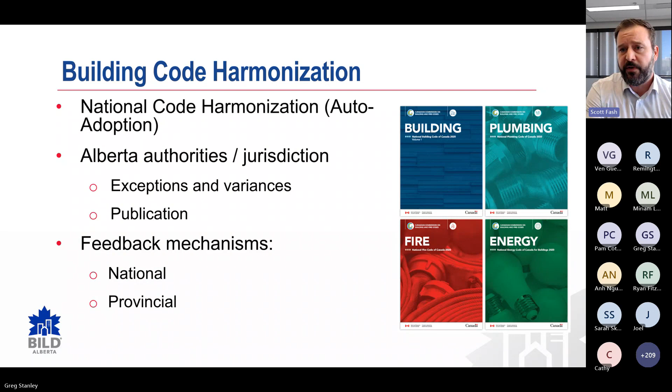Then provincially, as I mentioned through this auto-adoption piece, there are abilities for us to make modifications to that code before we adopt it. That's typically done through engagement with ourselves and Municipal Affairs within the government of Alberta. We also work and have representatives on the Safety Codes Council, which is another one of those bodies that provides input to the federal government. I'll go to the next slide, Greg.

So with all of this being said, where we are at right now is adoption of the 2023 Alberta edition of the National Building Code, with a May 1st implementation date. The key thing I want folks to be aware of is if you get an application or permit submitted prior to May 1st, you can still abide by the old code. So if you're worried about whether you'll be compliant with the new code or not, get your application in prior to May 1st and you can still abide by that old code. But after May 1st, the intent is that the new code will be in force.

The big item that's been brought in as part of this code cycle is what's called tiered energy codes, and I'm going to spend a bit more time at the tail end of this presentation going over that. But there's also a variety of other technical changes that are going to impact design and construction, and that's why I want to have Greg go over that in a little more detail - they are rather technical. So it is a short implementation and education timeframe.

This webinar is one source - we've got a ton of resources available on our website that we've been publishing on a regular basis. We do recommend members go explore that website. We'll have that up on the screen towards the tail end of this presentation as well.

Next slide, Greg. So we're going to go over 10 of the key changes right now. Before I hand it off to Greg, just as an overview - these were reviewed by our Provincial Residential Technical Committee, or PRTC. They went through that code line by line to understand the core changes that we think will impact members. We rated them based on impact, cost, and frequency, just to give a sense of what we really thought members needed to be aware of.

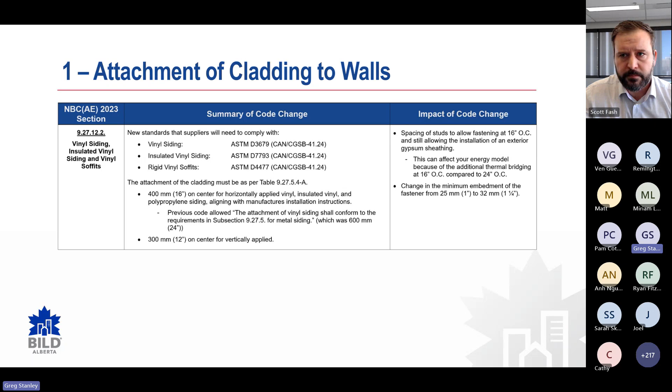First up, we have attachment of cladding to walls. Previous versions of the building code did not address specifics for fastening vinyl claddings, and referenced using the same fastening as you would for metal claddings. This code change has aligned the building code to manufacturer installation specifications based on requirements set out by the Vinyl Institute.

Important to note, as of May 1, horizontal vinyl applications will require a maximum fastener spacing of 400 millimeters on center, so that's 16 inches. It must be fastened to framing members, furring members, or blocking between framing members - fastening to sheathing alone is not compliant. This impacts traditional construction, where normally you'd use 24-inch on center spacing; with horizontal vinyl, that will need to change down to 16 on center.

Then we get into vertical vinyl applications. That will require a maximum fastener spacing of 300 millimeters, 12 inches on center. Your vertical application is also required to be fastened to the same members noted for the horizontal application.

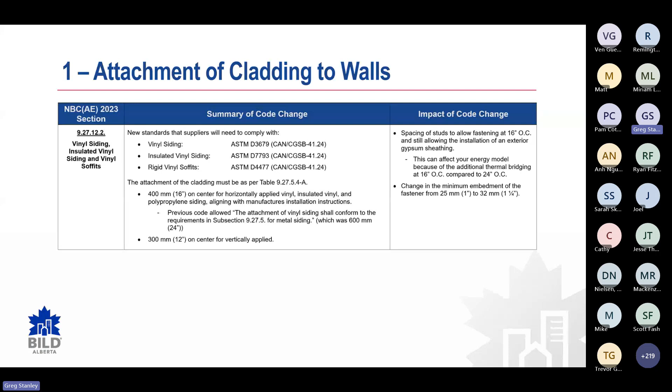Since this change has come out, it's prompted a little more review, and we've had some member organizations reach out to the Vinyl Institute - they have been testing other fastener spacings, so there's going to be more to come on this. We'll keep all members informed as we find further information on different spacing, if we can go back to 24. But as of May 1, we will need to adjust to make sure we're compliant with the attachment of vinyl claddings.

Next, we're going to get into penetrations in a rated assembly. There are some new requirements for penetrations within rated assemblies. Pay attention to updated requirements for continuous barriers in section 9.10.9.2, and section 9.10.9.8, which references outlet boxes in concealed spaces. This will require more attention, as there are updated requirements for maximum sizes and required separations.

Non-combustible boxes are going to be allowed with a maximum individual area of 24 square inches and an aggregate area of 100 square inches within any 100 square foot of surface area. Combustible boxes are allowed and must be separated by an enclosure no larger than 465 square inches, approximately 20 inches by 20 inches. It must be made of a fire block material, or located in a space with rock or slag insulation where the sides and back of the outlet are encapsulated by this insulation.

These boxes will also have a maximum individual area of 24 square inches. Important to note here is your maximum individual area of 24 square inches - your typical outlet box is only 8 square inches, so you'll have to pay attention to any gang switches or outlets. You can generally have a maximum of 3 gang together before you exceed that 24 square inches, so you might have to have multiple gangs that are separated from each other.

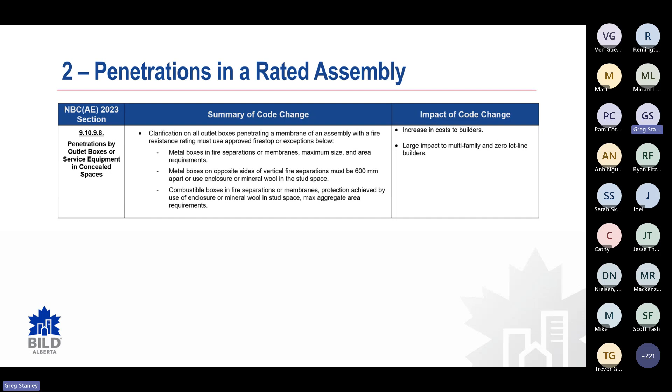Next is outdoor intake and exhaust openings. This change was brought about to align the building code with current requirements of the gas code for intakes and exhausts. You're going to require a separation from air intakes for mechanical ventilation from exhaust outlets that may contain contaminants, such as gas vents, with a separation of 1800 millimeters. That's 5'11". These air intakes are for fixtures such as your HRVs, fresh air intakes, makeup air intakes, things like that. And then also exhaust outlets that can discharge air that contains moisture.

These exhaust outlets are for your dryer vent or bath fans, pieces like that. That one will have to be 1800 millimeters away from the air intakes and any vented soffits. And if any of these same exhausts are in a sidewall and within 1800 millimeters of a soffit, there's a portion of soffit that is going to be required to be unvented or blocked.

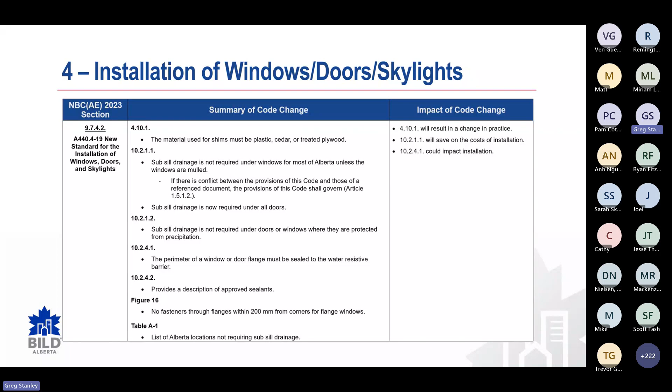So again, shim materials may result in a change of practice for builders in the province. And there may be some cost savings if you're in a location that will not require sub sill drainage, but we also recommend working with your window suppliers to determine your best installation details for your home that are going to comply with these standards.

Next up is required guards. We have had some changes for when a guard is required to be installed. Previously, code required that the guard would be installed where your landing surface was greater than 600 millimeters from the adjacent grade, or if the adjacent grade within 1.2 meters of that surface had a slope of more than 1 in 2, you would require that guard as well.

Now the code is going to require the guard where the surface is more than 600 millimeters between your adjacent walking surface and that landing area, but this is going to be within 1.2 meters. So they took away the slope portion out of the article. So if your grade 4 feet away from your surface is going to be more than 600 millimeters from your landing, you will require to install that guard.

So code will now require the guards to be installed for that surface as well. So even when you get into the portions where you might not require a guard because you have, say, less than 3 risers, if that grade at the 4 feet is more than 600, you will still require that guard. The building code does have some further information and diagrams within the notes to Part 9.

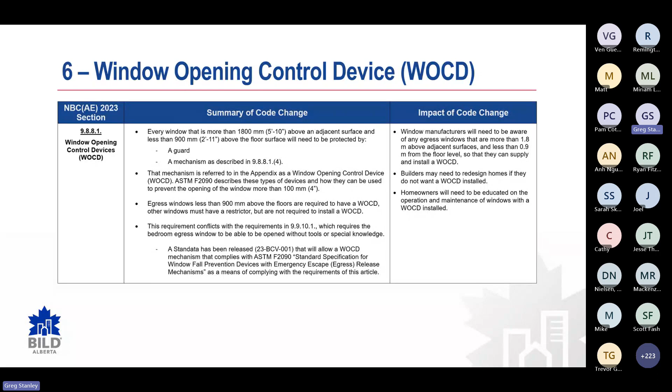However, the variance or the standata will not be permitted for use in any adaptable or barrier-free dwelling units. So if you are building any of those types, just be mindful of the new changes to windows here. All building standata can be found through the government website. It's also going to be a good topic to review with your window suppliers to make sure your homes will meet all required compliance for windows.

Next is fire resistance and fire protection ratings. Tables 9.10.3.1A and B have been updated in the building code along with the notes to these tables. As you use these assemblies in your projects, it's going to be good to review and make sure you're still meeting all of the required ratings as they've changed, and that you're meeting all of the notes within these tables as well.

Some of the notes may require you to change some of your construction practices. One of the major additions to table A is note 16, which now requires attachment of gypsum board on the interior side of an exterior wall assembly with fasteners spaced no more than 8 inches on center, and it will require all of the joints of the gypsum to be backed with blocking as well for attachment. So again, if you're working with any of the listed assemblies within the fire and sound resistance tables, have a look through, make sure your practices are going to meet the requirements of these new changes.

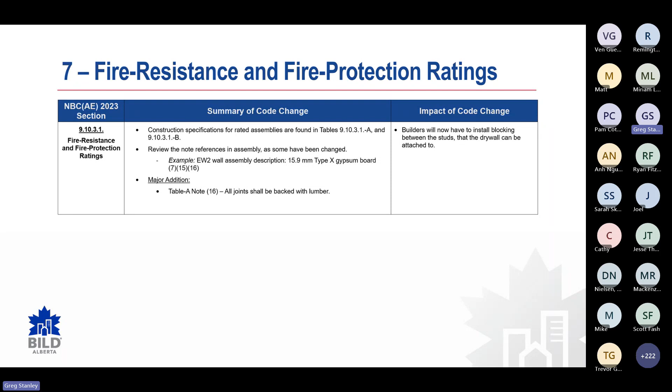8th on the list was equipment efficiency. There have been many changes for equipment efficiencies in 9.36. Highlighting some of these, minimum equipment efficiency has increased for warm air furnaces from 92% AFUE to 95% AFUE. This change now aligns with NRCan's minimum requirements for changes that were effective December 12th, 2019, and would apply to new construction.

All gas and electric forced air systems must now use ECM high efficiency motors. Service water heating equipment has changed from a measurement of EF to UEF as well. There's quite a few adjustments within the equipment. One specifically to note is that the gas instant systems may have slightly increased minimum performance requirements, especially when you get into the larger systems.

So what this means is, typically any builders using the performance compliance path for energy efficiency are going to see the most impact, as your reference house baseline will improve because of using that 95% efficient furnace versus the 92%. It's going to make it a little more challenging to meet or exceed energy targets of the reference house. So pay attention to those as you're working through your details and determining your wall assemblies and efficiencies of your homes.

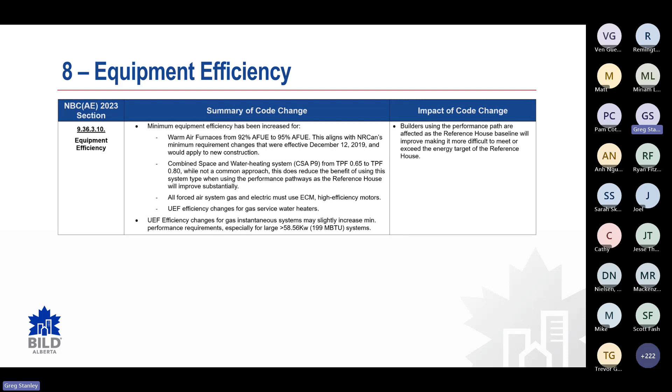9th on the list is air tightness. There have been improvements made to this portion of the code. While the previous code penalized builders when air barrier details were used from 925.3 and testing was not conducted, the new edition no longer has this penalty, and it neutralizes the energy loss calculated due to air leakage between the proposed and the reference house.

936.6 is a new section that has been added that gives some substantial clarity around the use and targets for air tightness in all of the compliance paths. This also provides clarity on the use of CGSB 149 for the determination of air tightness of building envelopes by the fan depressurization method. So this is your blower door testing.

And both guarded and unguarded testing is now allowed. Modeling of the proposed home will have a maximum of 2.5 ACH for all home types and will no longer allow the use of 3.2 ACH or 925 air barrier details. Modeling of attached homes can now use 3 ACH, which was previously 2.5 in the reference home model, which is going to allow for some increased air leakage at the party wall when you're using unguarded methods of testing.

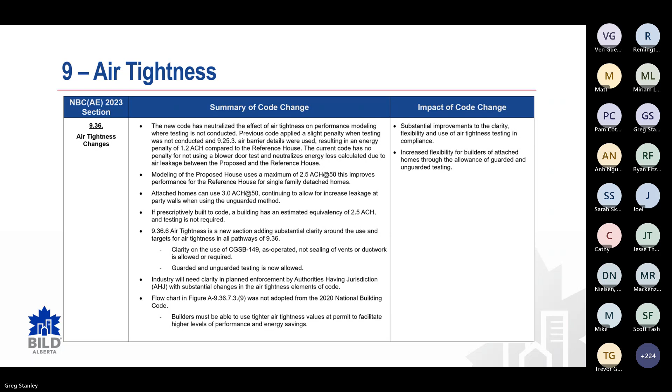And last on the list was energy efficiency. There have been various adjustments to 936 in this edition of the code. The biggest change is the addition of tiered energy performance. Scott's going to go into that in a little more depth after this.

What's important for us today is that the province has decided to start with Tier 1, and that means all municipalities must adhere to this. They do not get to choose a different tier. We are all going to play on the same level within Alberta.

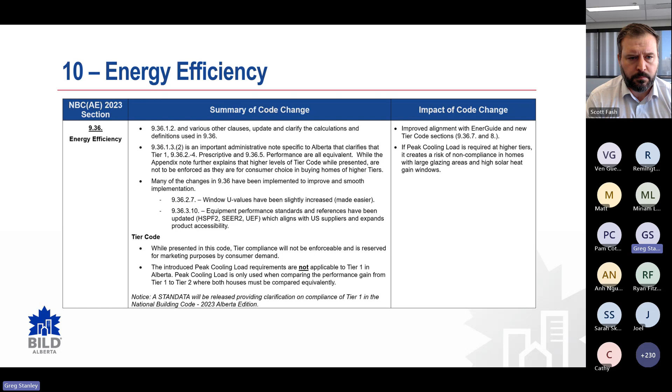So under the compliance clause, 9.36.1.3.(2) is unique to Alberta, and it deems that compliance with the subsections 936.7 or 936.8—that's the prescriptive and performance paths of the tiered energy performance compliance—under this section, all the tiered stuff, as long as you're Tier 1, meets all of the requirements of how we are currently working with performance and prescriptive compliance today.

So there's going to be very little change to your current construction practices to meet the energy targets. However, if you do choose to go to a higher tier, there are going to be additional requirements in those tiers.

So many of the other changes to 936 are going to make things a bit smoother for you as well. As an example, window U values have slightly increased. Just picking out zone 7A now will require a value of 1.61 versus the previous 1.6. It doesn't sound like much, but everything always helps a bit.

It shouldn't really change your products, but it'll slightly help the energy modeling if you are using the performance compliance paths. You will see some equipment performance standards and references have been updated to use different metrics such as HSPF2, SEER2, and UEF. What this does is align with US suppliers, and it can help expand product accessibility for us in Canada.

And last in this section, the continuity of installation has been improved to provide further clarification regarding what is required when you're installing plumbing or electrical conduits in the exterior wall. So have a look at that. It's going to give you some clarity on what you need to do when insulating around any kind of conduits or plumbing that may be located in these assemblies.

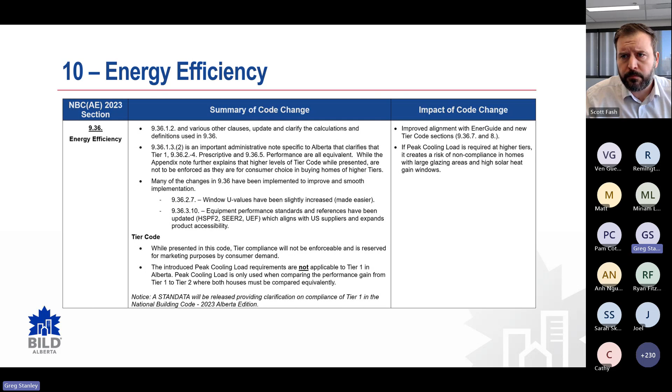So with that, I'm going to turn it back over to Scott to talk about the tiered energy codes.

Awesome. Thanks, Greg. Great job breaking down that stuff. And I see there have been some questions in the Q&A. For folks, again, please, if you do have questions, don't hesitate to throw them in there. I see Keith is diligently trying to respond to the ones that he can, but we will hopefully have Greg go through those after we get done with the crux of the presentation here.

Just to again give a bit of an overview of what the tiered energy codes are, where we are at, and where we're potentially going.

For those not familiar, this is intended by the federal government as a pathway to effectively mandating net zero construction for new homes. It's designed with tiers 1 through 5. Tier 1 would be kind of current code, what we do right now. Tier 5 would be what they'd consider effectively a net zero home. From Tier 1 up to Tier 5, we see progressive increases to air tightness, increases in terms of requirements for insulation, windows, and the efficiency of mechanical systems.

We looked through this in quite a bit of detail back in 2021 and 2022, and we developed what we called our tiered energy code roadmap, all available on our website. As part of that process, it was pretty apparent that tiers 1 and 2 should be manageable for the majority of membership. We didn't flag anything that seemed really difficult or overly complex for people to adapt to over time.

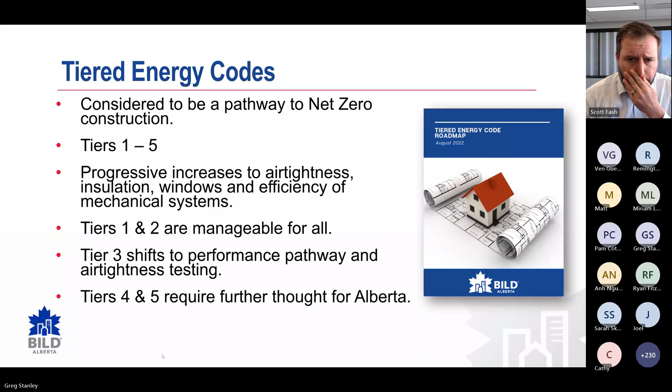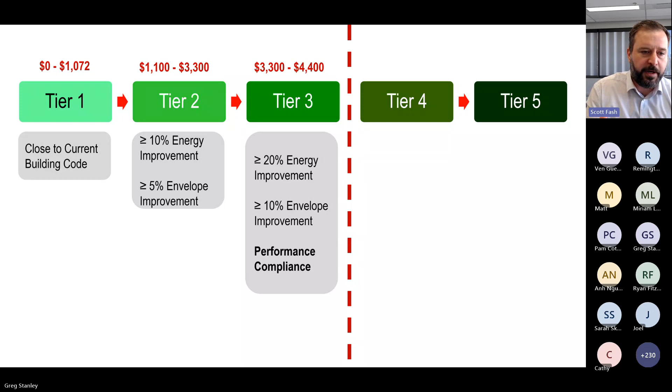Just to give you a sense of what tiers 1 through 3 are: Tier 1 is very close to current building code. For tier 2, you're looking at a slight increase in the energy improvement and the envelope improvement. Tier 3, a further increase in the energy and envelope improvement, but the big shift at tier 3 right now is a shift to performance compliance. Cost impact wise, tiers 1 and 2 are very minimal by and large. Tier 3, we see about a 3,300 to 4,400 cost impact.

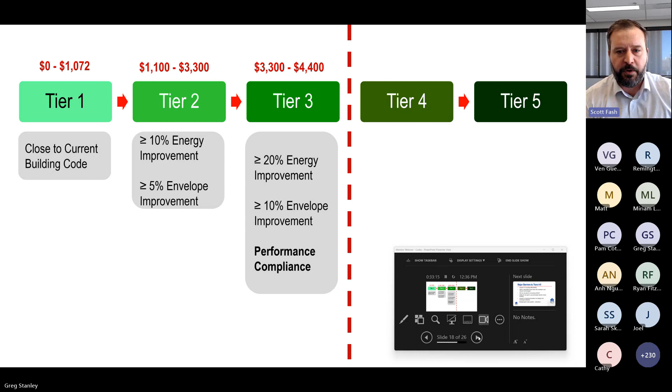But we'll skip now and I'll give a bit of an overview of what tiers 4 and 5 look like. If you go to the next slide, Greg. So, Greg, I think you've got your—

There you go, perfect. So the major barriers we're seeing to tiers 4 and 5: significant cost impacts on housing construction, I'll go over that in a second. But even beyond the cost piece, there's some technological challenges we're going to have to figure out provincially here in Alberta. One is it requires a shift to electrified home heat. For those not following this closely, that effectively requires us using a lot more heat pumps to heat our homes, and those have not been proven to work all that reliably in really frigid temperatures—minus 23 or 24 and cooler, there's some issues with reliability.

There's also a discussion that needs to be had on whether we'll actually be increasing our greenhouse gas emissions. If we move to electric home heat with a whole bunch of heat pumps tied into our grid, we still actually burn a lot of fossil fuels to generate our electricity. So you will likely be generating more greenhouse gas emissions than you would using a high efficiency natural gas furnace, which doesn't make a ton of sense.

Then there's the question of whether we have the capacity or ability for our grid to accommodate a more broad shift to electrified home heating, even in the new construction market. I don't think we've been given an answer to whether that's possible or not. I'm not an expert in this by any stretch, but that's one we pose to government and the proponents in favor of this—we need to first understand whether our grid can actually handle this.

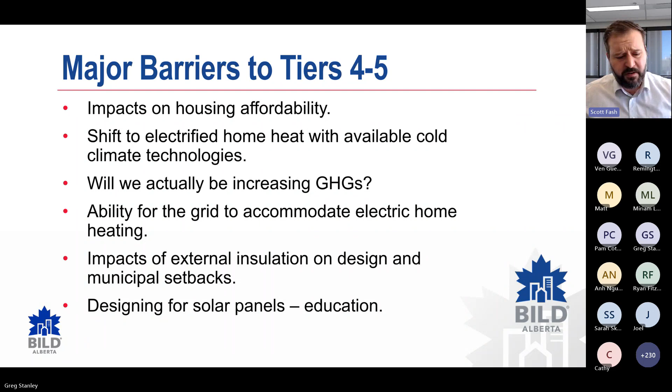So for tiers 4 and 5, the cost estimates we did go back to 2022, so I'd argue they're probably out of date. These costs likely would be higher at this stage.

Tier 4 would kind of be what would be considered a net zero ready home, although I've also heard you can potentially meet a net zero home at tier 4. It's confusing, there's no real defined lines on what's net zero or net zero ready, but in theory tier 4 is intended to be that net zero ready stage. You're looking at a significant energy improvement of greater than 40%, a significant envelope improvement, and then that big shift to electrified home heating.

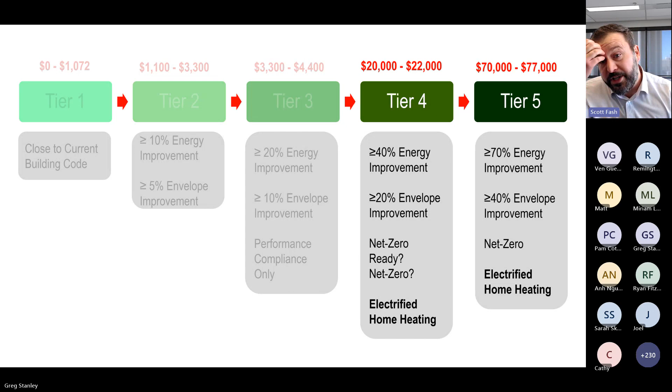The major difference between tier 4 and tier 5, beyond the insulation and efficiency of your mechanical systems, is that's where you're looking at adding PV cells or some other form of renewable energy source to the home. So significant costs: tier 4 is 20 to 22,000, and tier 5 is 70 to 77,000 dollars a door.

So we'll go to the next slide and talk about BILD Alberta's recommendations. Before we do that, this information is all available on our website. This was part of the roadmap that we put together, and it provides a breakdown of what happens at each tier.

Rather than just that cost impact, it may be more effective for you as a builder to look at the increase to construction costs, so we've got that column there that goes through it. This is all based on modeling that we had some builders do with energy advisors, to try to assess what the impacts of each tier are.

So effectively, that net zero ready tier, we anticipate that's a $20,000 to $22,000 impact at least. The net zero tier is probably a $70,000 to $80,000 impact. Next slide.

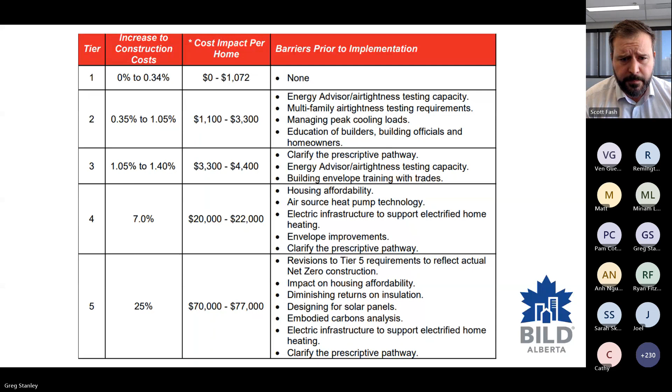So the recommendations we provided to the government of Alberta, and by and large to date they've accepted those recommendations, are similar to recommendations also provided by the Building Subcouncil of the Safety Codes Council. But effectively, it's consistent application of the energy tiers province-wide.

This was really important in BC. They do not have this legislative framework in place, so you have municipalities adopting different tiers, and in a lot of instances builders are having to comply with 3 separate, effectively, building codes within the same area they do business in. It's created a ton of challenges for those builders, and we were pretty adamant from the early stages that wasn't something we wanted to see in Alberta. That was largely agreed by our regulator, Municipal Affairs, and the government of Alberta.

So the way that was done is, obviously in code, they're adopting one tier, they're not enabling people to choose. But the other piece was they removed a clause from city charters, a piece we've been advocating for a while, that allowed municipalities, or the 2 cities in particular, to choose their own energy tier. So all that means is effectively we're at tier 1 in Alberta, and that applies to every municipality. They cannot mandate you build to a tier above tier 1.

We view tier 1 as that launch pad to have discussions like we're having today, to launch some additional education and research, to build capacity to support not only our builder and trade members to move through the tiers, but also to support our municipal jurisdictions and safety codes officers to move through these tiers more effectively. So we think we can get to tier 2 within 1 to 2 years after tier 1. We want to do a bunch of the education and capacity building this year at tier 1 to allow us to smoothly move to tier 2 within a year or 2. For tier 3, our feedback to government has been that implementation is going to be dependent on whether we have the energy advisor capacity to make this work more broadly.

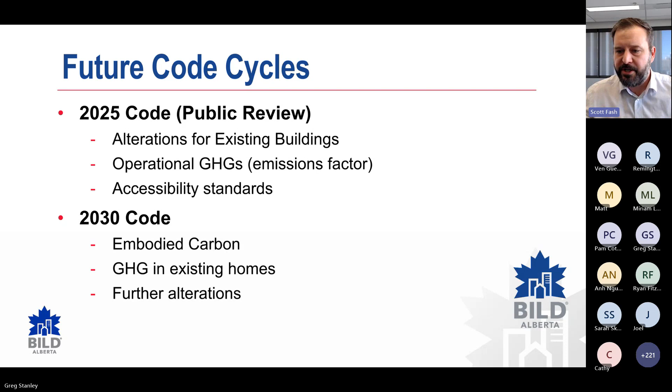Greg, have the majority of questions been answered in chat, or are there some you want to call out? There's some that are still unanswered, but I can just go through them all quickly so we have it on the recording too.

Yeah, that'd be perfect. So first, there was a question about the vertical vinyl application being attached to 7/16 OSB. The question was if stud spacing was allowed to be 400 millimeters, and yes, that is totally okay. Vertical vinyl application can be attached to the sheathing only, as long as it's 7/16 thick, and then the stud spacing behind it doesn't have any impact on the fastening of that.

There was a question about exhaust vents within 1800 millimeters clearance. Does the clearance to vented soffits apply for vented soffits for a balcony system, or only vented soffits leading to an attic space? 9.32.3.13 doesn't say anything specific about attic spaces, but a safety codes officer could decide that a soffit under a balcony system could be treated the same way.